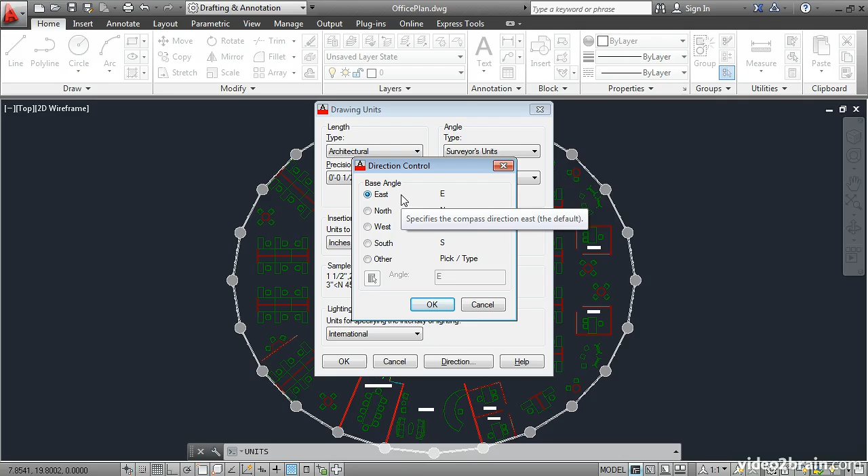Angular degrees use different units. Decimal degrees is the most common choice, but if you're working with surveyor data, you might choose one of these other options. If you're measuring with surveyor's units, you also need to change the direction of the coordinate system. Surveyor's units are measured from true north. East is typically chosen for most people because this is the convention of 0 degrees is to the right, or in the east direction. I'll leave east selected and I'll go back to use decimal degrees.

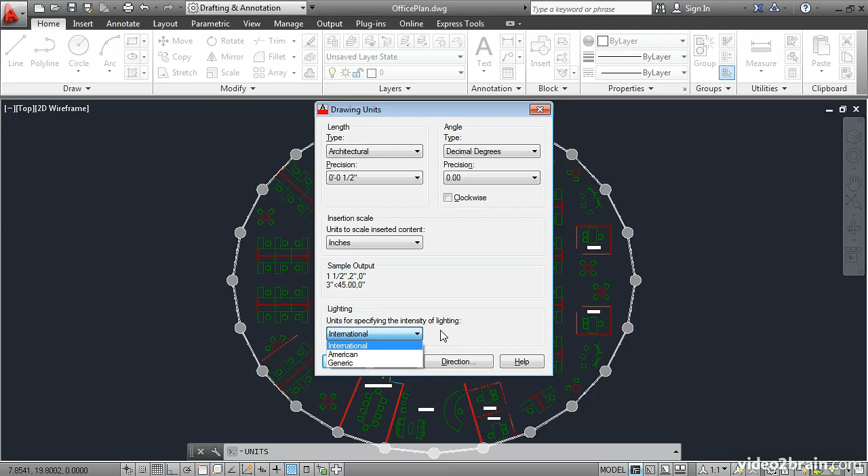This controls content that's inserted as a block, and inches is the correct choice here for architectural units, so I'll leave this alone. You can also select the units you want to use when you're making renderings of 3D models. I'll leave this set to international and click OK.

Now I'll zoom in by rotating the mouse wheel forward, and then I'd like to draw a line using imperial units. Click the Line tool, and then specify an arbitrary first point. Then go ahead and type in a value like this, 3 feet, using the apostrophe symbol next to the Enter key, and then type 6-1/2. What this means is 3 feet 6½ inches.

The dash is necessary as a delimiter between the inches and the fractional inches. Without it, you'd either have 61 halves, or you'd have a space which would terminate this part of the command. Remember, the spacebar is equivalent to the Enter key. So the dash is necessary in imperial units when you're separating inches from fractions of an inch. So then I'll press Enter to specify that point. And now I've successfully drawn a line segment measuring this precise distance, 3 feet 6½ inches. I'll press Enter and then Enter again.

Let's draw one more line in architectural units. I'll draw another line of the same length, but I'll enter it in a different way. I'll type 3 feet 6.5. This is acceptable. You don't have to use fractions. You can use decimal fractions of an inch. So I'll press Enter and Enter again. So I've drawn 2 lines of the same length.

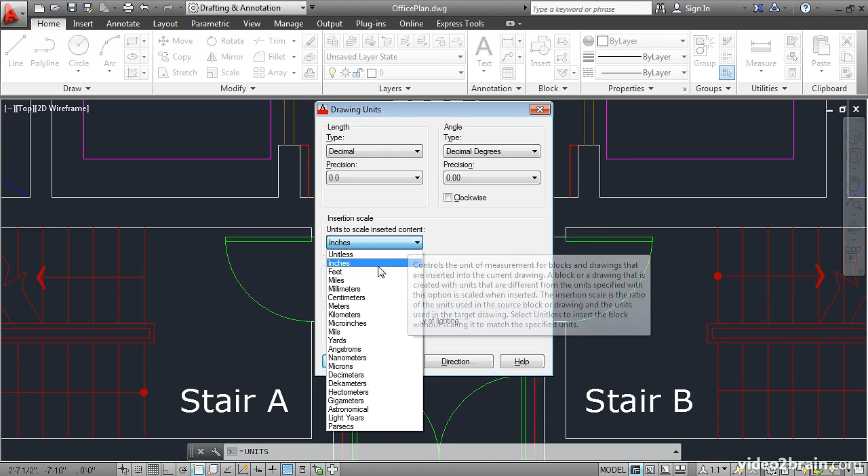Now I'd like to convert this drawing to metric. So the first thing you need to do is change the units. Type UN, Enter, and then change the type to decimal. Change the insertion scale to your choice. In this case, I think I'll choose centimeters. And then I'll say OK.

I'll measure this distance again. And it says 36.0. So even though it's in decimal units, it's really the same size. And really, these are inches now, not centimeters. So we're missing something. And that something is we need to scale the entire drawing by a scale factor in order to truly convert it from imperial to metric.

So click Scale on the Modify panel. It says Select Objects. Type in All and press Enter. And then press Enter one more time to exit the Select Objects prompt. It says Specify Base Point. Type in 0,0 to indicate the origin point. And then the scale factor is 2.54 because there are 2.54 centimeters per inch. Press Enter and zoom out a bit by rotating the mouse wheel.

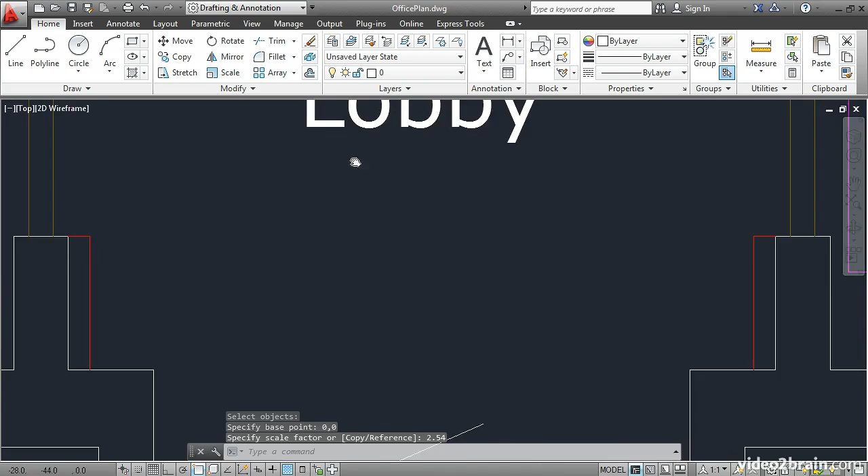And then measure the distance here. From this point to this one measures 91.4. This is actually the correct value in metric for this 3-foot opening. We can verify that by typing in QuickCalc. And then you can scroll down here and convert the value of 3 feet to centimeters, and you get 91.44.

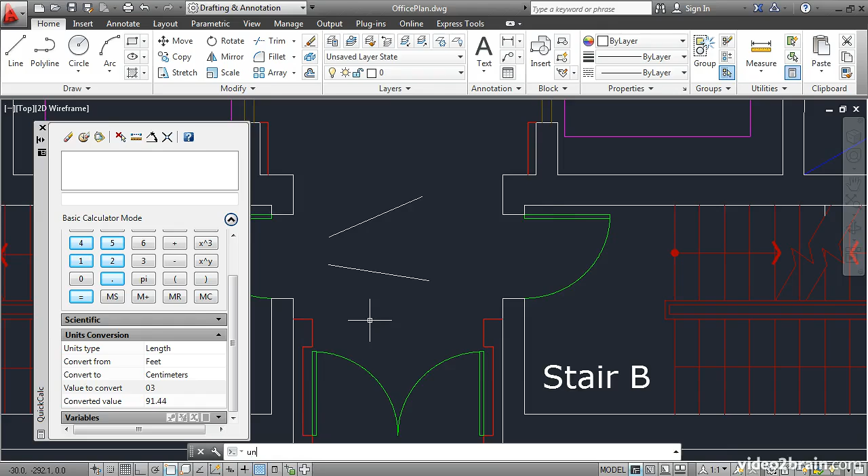When we measured the distance, it rounded it off to 91.4 because of the precision setting that we had selected earlier. Let's just go to Units, increase that precision all the way to the maximum, and measure that distance again. We get 91.44 exactly. So we've successfully converted this drawing from imperial to metric.

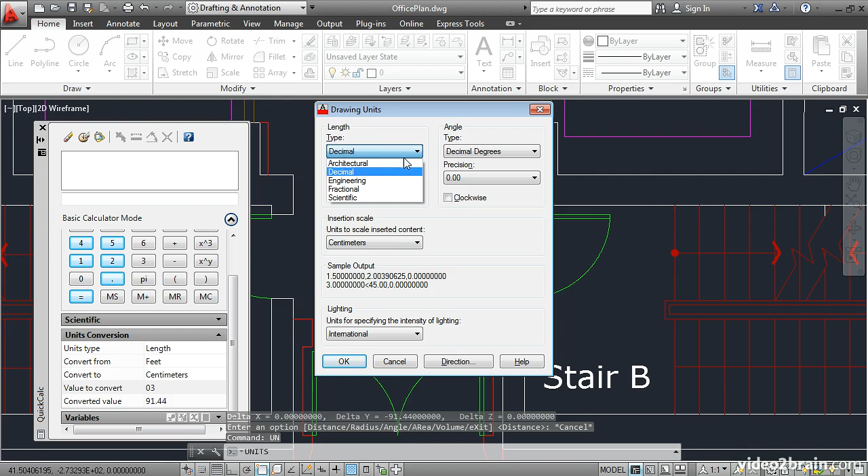Now let's go the other way. Let's convert this back to imperial. So if you're starting with a metric drawing, the first thing you need to do is change the units. So UN, Enter, set it back to architectural, change your insertion scale to inches, and click OK.

Then scale, SC, Enter is an abbreviation for that command. Select objects. We want everything, so we'll type All, Enter, and then Enter again to exit the select objects prompt. The base point will again be the origin point, so that's 0,0. I'm specifying the x and y coordinates here. Press Enter, and then we need a scale factor.

And for this we need 1 over 2.54. But we can't enter that here on the command line. We have to use the calculator to help us. I'll say 1 divided by 2.54 equals this value. I'll click this button to paste that value to the command line, and then press Enter. The whole drawing was scaled by that factor.

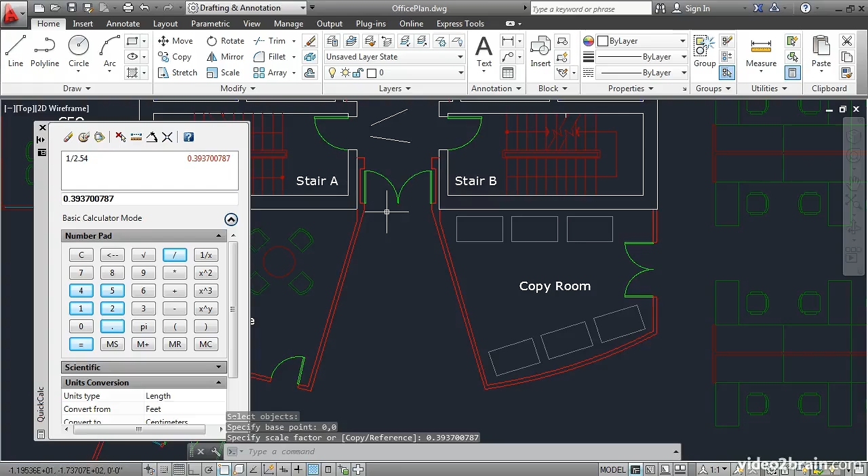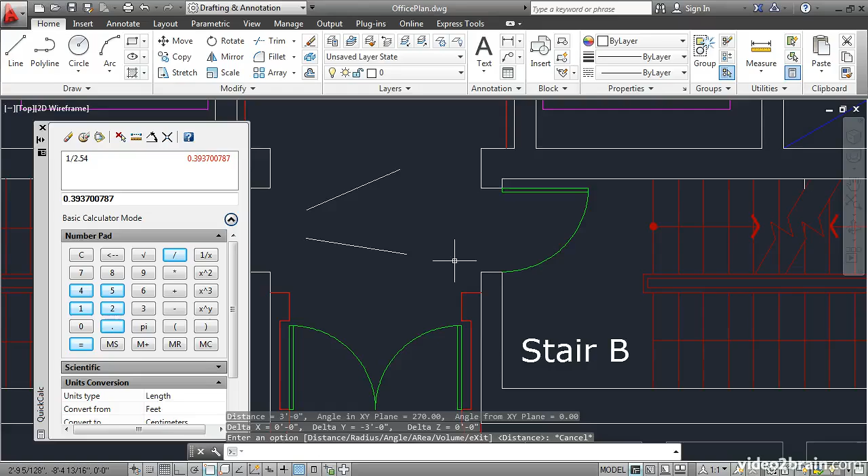Now let's zoom in and measure that same opening to see what distance we have. I'll use the measure command, click these 2 points, and the measurement is exactly 3 feet. So we have successfully converted a metric drawing to imperial. So in this lesson, you learned how to configure units and how to convert drawings between imperial and metric systems.